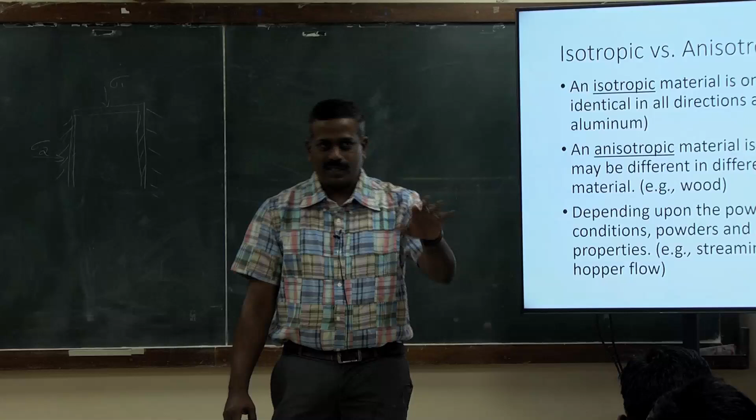Just for an example, you might know about different types of corn, right? You all know popcorn, yellow dent corn, high waxy corn, high amylose corn, etc., right? So their build of starch inside those corn, means maize, okay? You all know, right? So depending on this type of starch, their properties will also be different, right? Their mechanical properties - how the starch is intact inside the kernel will change almost all their mechanical behavior, okay?

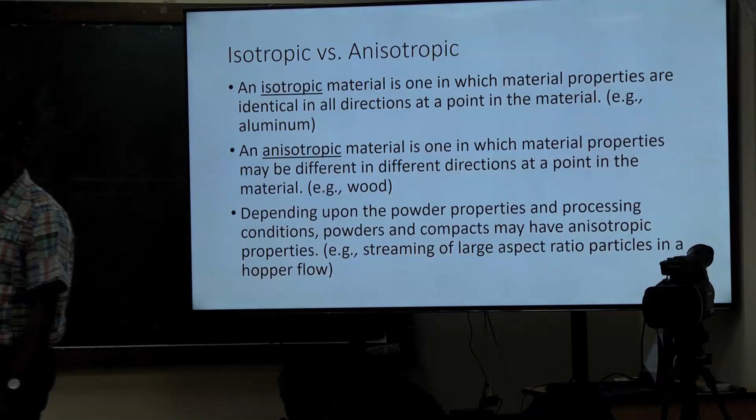Even optical properties, etc., okay? So again, for any powders or granular materials, the properties will change based on orientation, right? If you take a maize kernel, okay, so one side it will be germ, right? The other side it will be more starchy and protein component, right? So if you measure the properties on one side, it might be different than the other side, right?

So properties always differ, and again, other effects from shapes will also play a role. Composition, surface composition will also play a role when it comes to mechanical properties. But as said, the most basic stuff that we calculate is stress and strain, right?

Stress we calculate from force over area. Okay, there are two stresses, right? One is true stress and engineering stress, right? So true stress is divided by the current area.

That means when you are compressing or pulling - for example, you take a plastic sheet and pull, it slowly expands, right? But the cross-sectional area is also changing, right? It becomes thinner at the middle, right? So that's what we calculate in true stress. That means we account for the change in cross-sectional area.

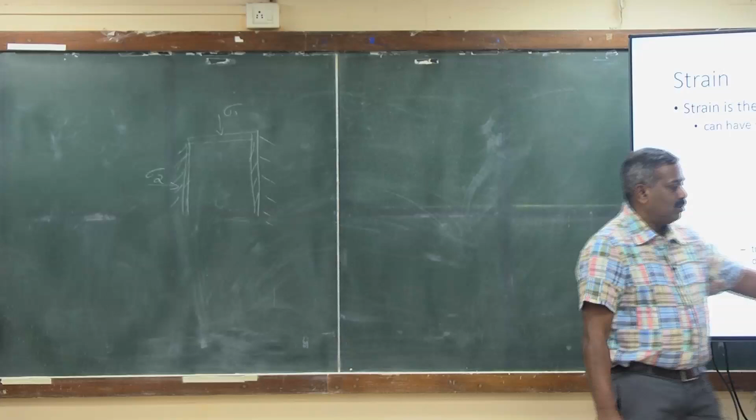But engineering stress is you take the original area that you are measuring, and that's it. You will not change the cross-sectional area for calculations, right? Same holds good for strain. Okay, so true strain again - change in deformation with the corresponding change in cross-sectional area.

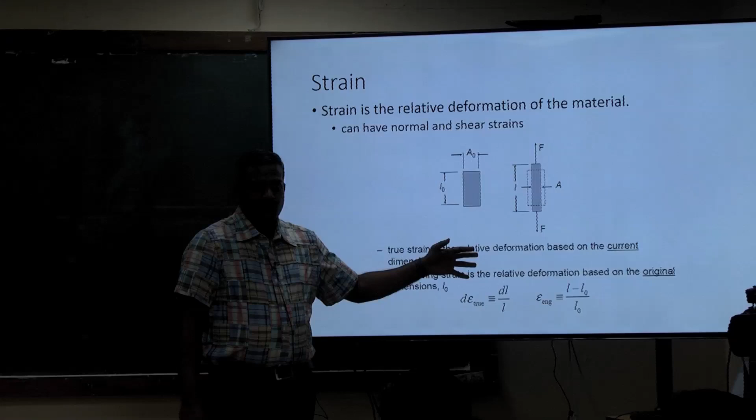But engineering strain is - we commonly don't take the change in cross-sectional area during the mechanical testing or mechanical process into those calculations. Okay, so calculating engineering stress and strain is easy, right? You know the cross-sectional area, you know the force, you do that, right? But for calculating true strain and true stress, it will be a little challenging. Okay, true strain, you can use some video recordings.

There are some LVDT - what's a linearly variable... dynamic testing instrument, that measures displacement. Yeah, that's very good. Yeah, displacement transducer, right? Yeah, LVDT - can use it to measure the change in cross-sectional area and get the true strain. Okay, so when you take a typical...

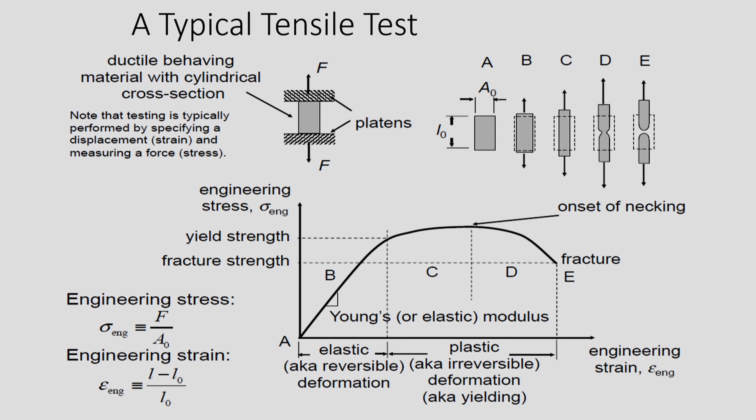Tensile test means you're pulling it. Okay, so what happens is - again, you can relate to pulling a plastic sheet, right? So what happens, it goes through elastic deformation, plastic deformation. At one point it breaks, right? So initially, at smaller loads, when you pull that plastic sheet, it also comes back to its original position, right? So that's the elastic deformation.

All the strength, whatever it lost during that pulling, will be regained by the material, right? But when you cross that yield point, okay, or yield strength, okay, there will be more change in cross-sectional area. That means there will be more change in the material behavior, where you will not regain it back. When you remove the stress, you will not regain back its original properties. Okay, that's the plastic deformation, right?

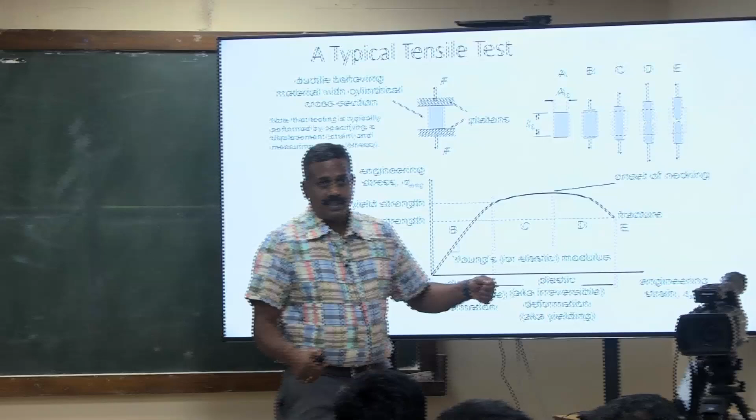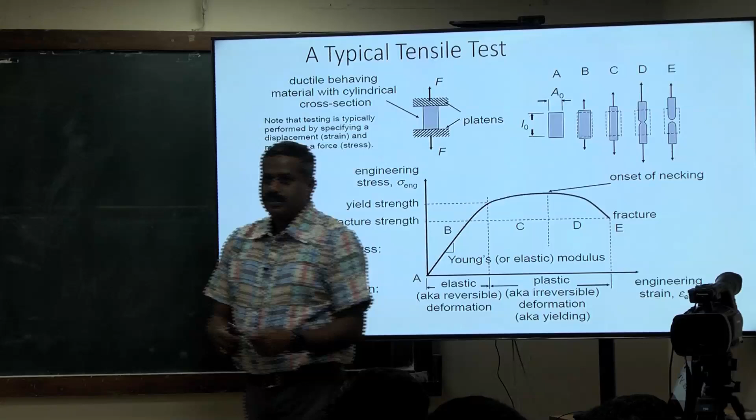Right, you all know about this—elastic deformation, plastic deformation, right? So when you keep on increasing the stress, you can imagine pulling a plastic sheet. At one point it forms a small neck, where it starts to break. So there will be an onset of necking, and then finally it gives up. You can easily relate, right? You would have noticed when you're tearing something or pulling something apart.

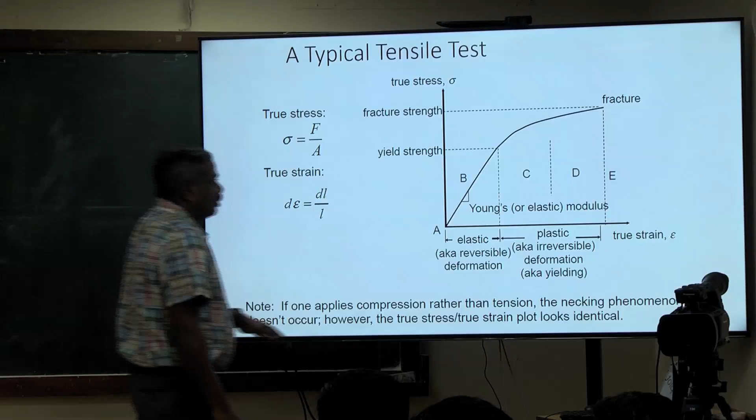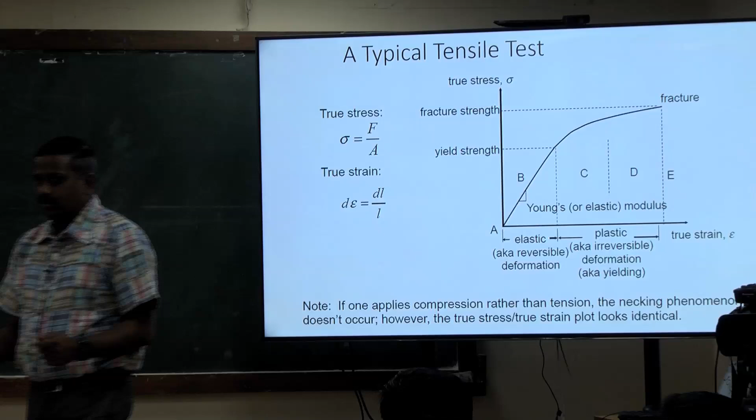This is a process we see when you are applying a tensile load, pulling it apart. But if you are applying a compression load, you might not see a necking phenomenon. So when you are compressing it instead of pulling it, it just breaks—it goes through plastic deformation, and finally it fractures. So those two different types of tests, compression and tensile testing, will be a little different.

But still it goes through some elastic deformation, plastic deformation, etc.

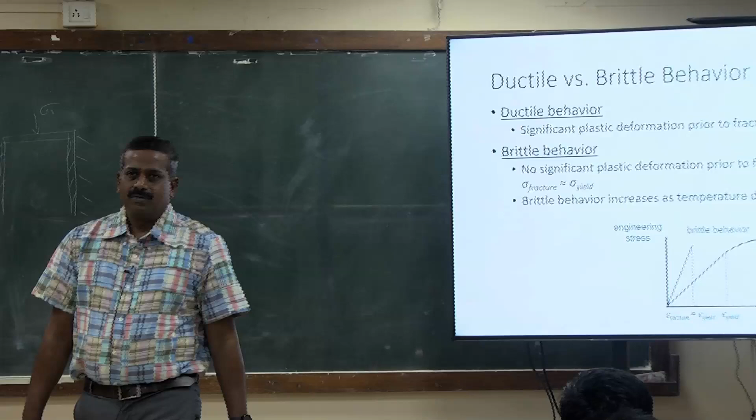So ductile behavior—again, there will be significant plastic deformation, comparing a plastic sheet. When you're applying some tensile load, it keeps on pulling until it breaks. But if it's brittle, what happens? It breaks suddenly, like comparing a plastic sheet to a piece of paper. When you pull a piece of paper, it suddenly breaks. That's brittle behavior—almost the fracture strength and the yield point will be almost the same. When you cross that elastic limit, it breaks.

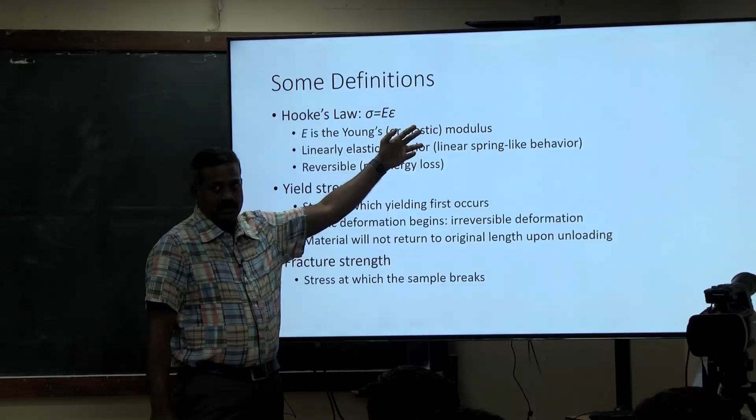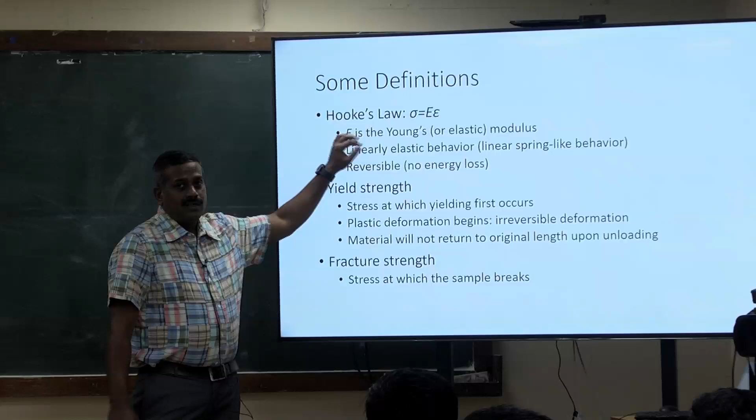And we can get this relationship from Hooke's law. Hooke's law, you all know about that—we use it for spring constants, getting those spring values. So stress is directly proportional to the strain, and the proportionality constant is the Young's modulus, or the elastic modulus value. Most commonly used for linearly elastic material. So if you have some odd relationship between stress and strain, you might not be able to use this Hooke's law. That's why it makes it very difficult to measure Young's modulus for biological materials—the relationship is not linear.

Again, yield strength—the stress at which it starts yielding, and there will be more plastic deformation, that's the yield strength. Fracture strength is the load at which it breaks.

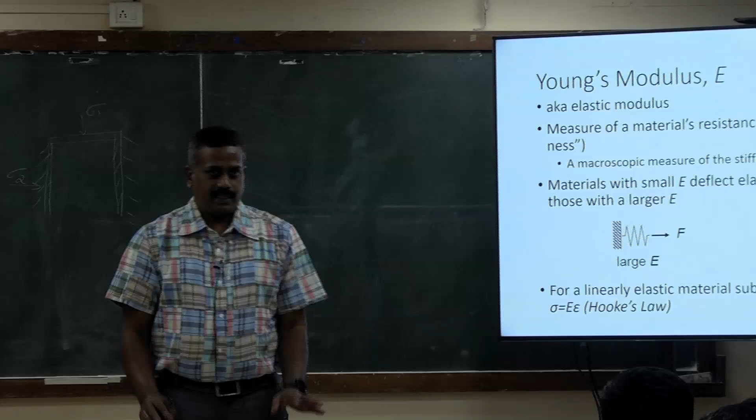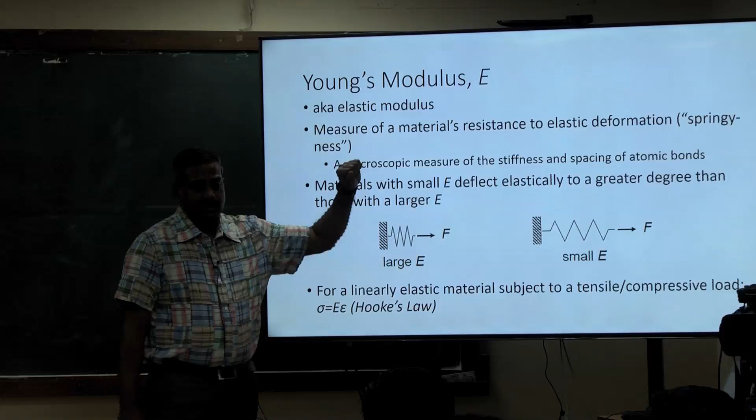So the first property, Young's modulus—we talked about it being a relationship between stress and strain, very commonly used to characterize the resistance to elastic deformation. We use the linear part of that stress-strain relationship—not the nonlinear part—just the linear part, to get the relation between stress and strain and obtain the Young's modulus value.

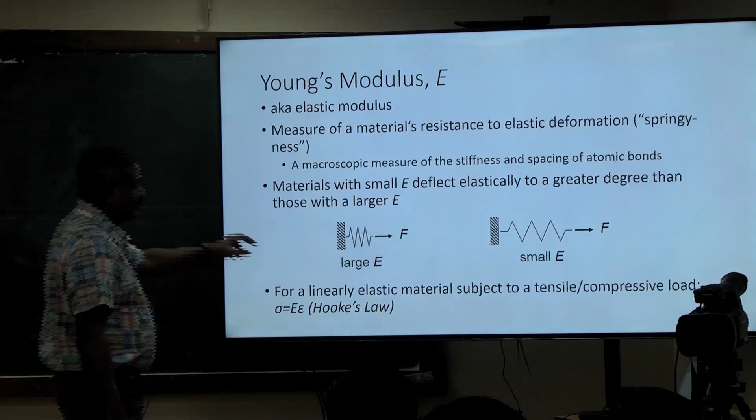And with a smaller E value, they deflect elastically to a greater degree. That means if it's a spring, the elastic modulus will be low, but if it's a hard material like compact or something, their elastic modulus will be high.

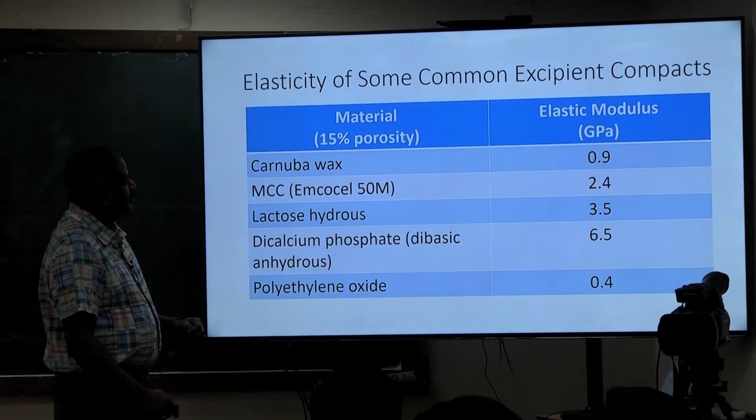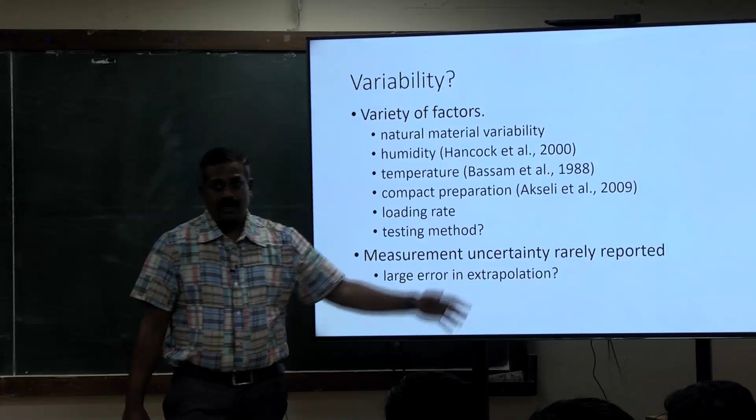Just quickly, as I said, if it's a lighter material, the elastic modulus is usually low, and the values apply mostly for pharmaceutical stuff. Elastic modulus is a material property, so the temperature, the humidity, and the conditions the samples are in will affect these elastic modulus values, including how we prepared the compact—like what strain rate we use to prepare a compact will also influence the elastic modulus. Loading rate, strain rate, testing method, etc.

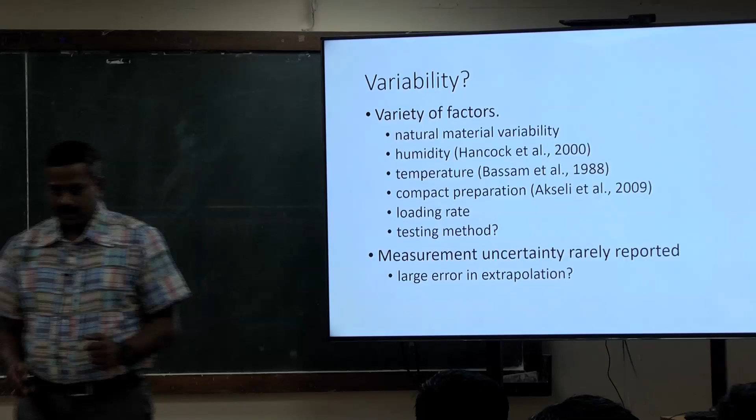But in general, you might remember the Spriggs equation that we talked about yesterday, which we used to get an extrapolated value. So one of the major challenges is extrapolation to zero porosity value—that gives large errors, so mathematically defining this is a little challenging.

Humidity also plays a larger role—I will not go into that theory. The presence of water loosens those stronger mechanical bonds between the particles within the compact or any material, and this affects the overall mechanical strength and influences the Young's modulus value.

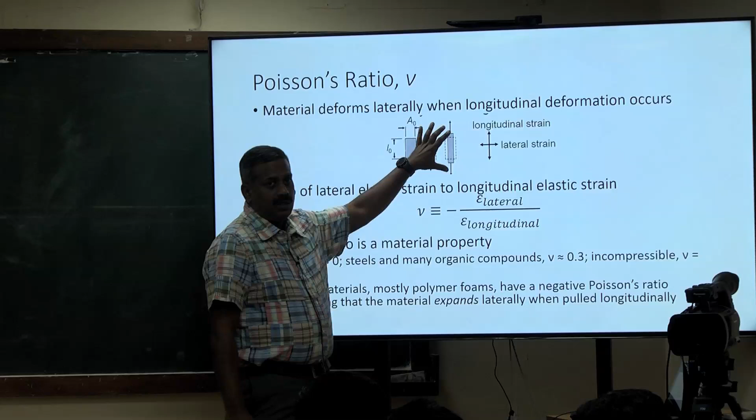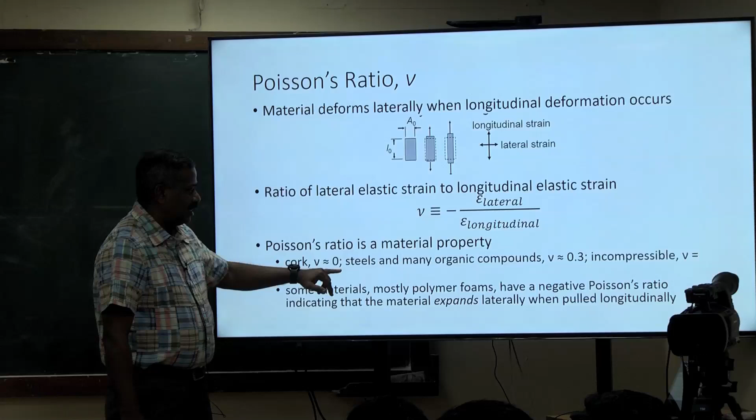Poisson's ratio is the relationship between lateral and longitudinal strain - how much material moves sideways relative to overall lengthwise movement. If you take that ratio, you get Poisson's ratio. Mostly incompressible material is 0.5, highly porous material like cork is usually 0. But for some materials like polymer foams, you might see a negative value, since when you pull them they expand laterally, giving a negative value, especially for foam materials.

Shear modulus is the ratio between shear stress and shear strain. It comes into play with flow of powders. You calculate shear stress, and you can calculate the shear strain - the strain needed to make the powder move or flow. You get those two properties and then get the shear modulus.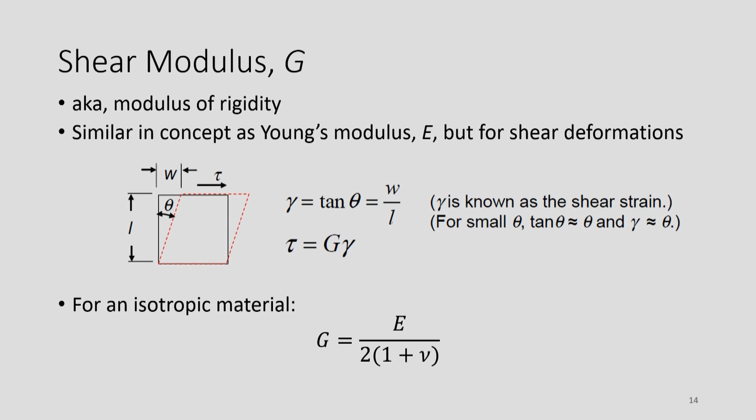There's a relationship that relates Poisson's ratio and elastic modulus to the shear modulus. I'm not going into the derivation, but these are simple formulas you can use to relate them - if you know two of these, you can find the other one. As the picture indicates, shear comes from one layer moving over the other layer.

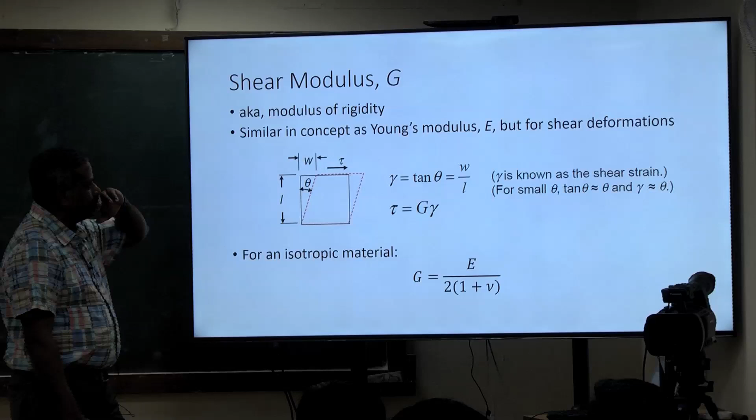Bulk modulus mainly applies when compressing materials - the change in pressure and the change in volume. When you compress a material uniformly from all 360 angles, it compresses in volume. That change in volume over applied pressure is the bulk modulus, and again it's in the negative direction. You might see negative values - for incompressible material it's usually high negative, for easily compressible material it's low negative values.

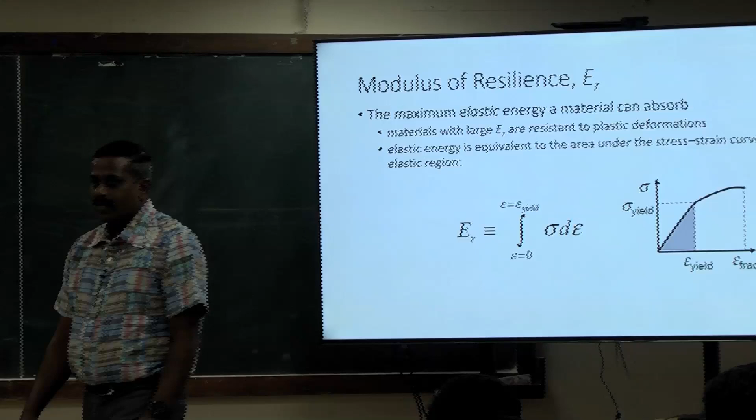Modulus of resilience is based on elastic energy. You take the area under the curve until it behaves as an elastic solid - that's the modulus of resilience. If you take the stress and strain at this point, that's the modulus of elasticity, but if you take the area, that's the modulus of resilience. That gives how much energy it loses and reabsorbs when applying stress and strain - the calculation of energy lost during this.

Toughness modulus is until breakage. You take the area under the stress-strain curve until it breaks, which gives the toughness of the material - how much energy it takes to break any material. This could apply both for compression and for tensile measurements.

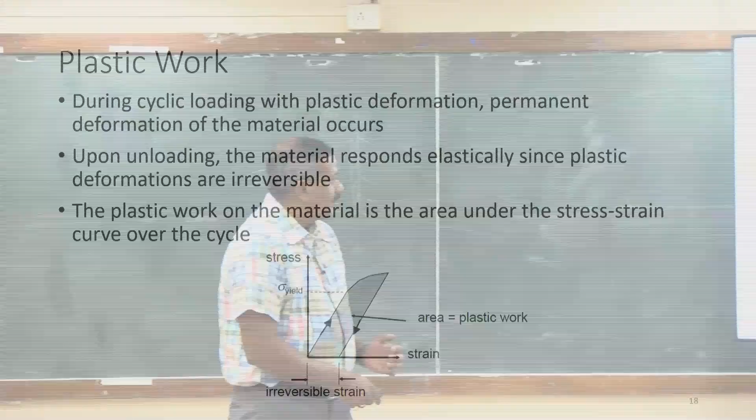Can you give some examples of these applications? We talked about examples before, and you all wanted more examples. So where do we apply this toughness modulus? Any examples that you can think of? Why do we have to characterize toughness modulus?

To determine up to what load it can be stable. So exactly, where do we see those applications? To differentiate between ductile and brittle - if the modulus of resilience and toughness are the same, we can say it is brittle, otherwise it's ductile. Sure, cracking some material.

Cracking - very commonly you can use this for milling purposes, that's a very common example. So how much energy it takes to mill or break into pieces, because when you exceed this toughness modulus, it definitely breaks. It's losing the same amount of energy that will be needed to break the material. So the same thing applies for modulus of resilience too - any examples of where we can apply modulus of resilience?

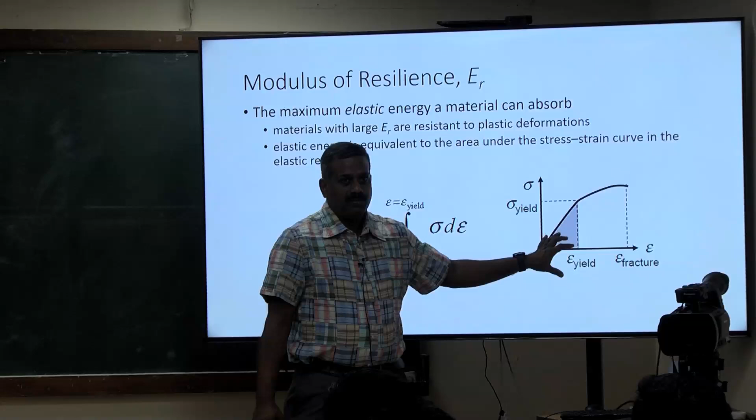You would notice this almost every day when you go shopping for fruits and vegetables - that's modulus of resilience.

In polybags, how long you can hold the bag before it breaks. Can you think of any example on fruits and vegetables? Like how we can keep the fruits and vegetables so that they will not get damaged. It can help with that.

So exactly for that, sometimes when you buy apples, you might see some brown spots. How does that brown spot occur? From damage, some impact damage, or some kind of abrasive damage.

But if the load applied on the fruit during handling is less than the modulus of resilience, then there will not be any brown spots. But if the load or energy applied on the surface of the fruit or vegetable exceeds that, then you will see brown spots. Based on the energy applied, the area will also increase.

I'm not giving applications or examples here, but you can relate these properties to almost everyday things that we do.

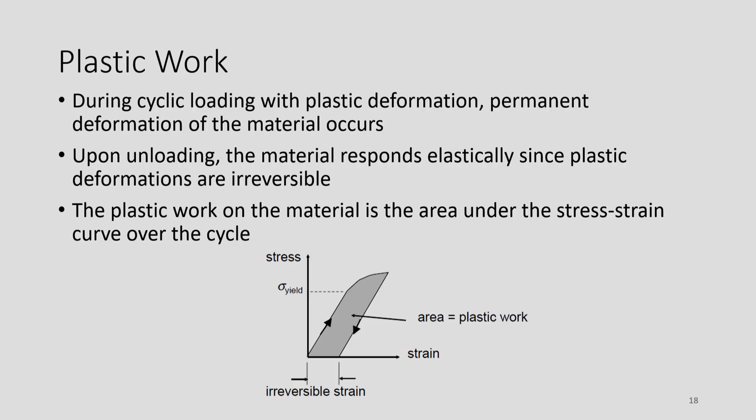Plastic work is mostly for cyclic compression. For example, I'm compressing this material like 100 times. When you keep compressing, once it exceeds the elastic limit, you lose some plasticity, you lose some energy. The difference between the loading and unloading curve, after it exceeds the elastic limit, is called the plastic work.

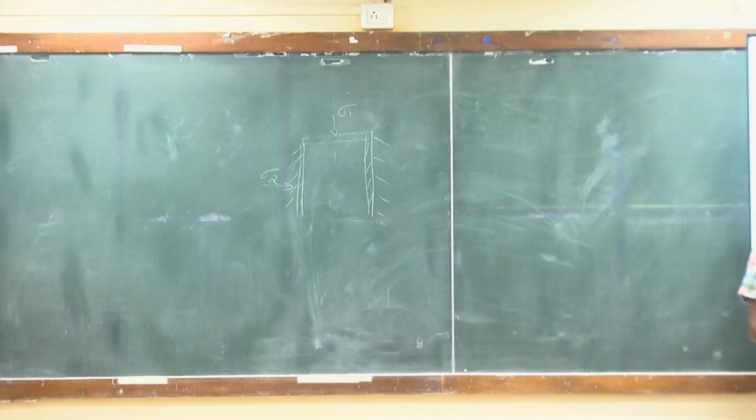So it's the amount of energy that the material loses between multiple cyclic compression or tensile loads. So what example can you think of where we apply this?

So hardness is the surface resistance to plastic deformation. We mostly use this when it comes to abrasive damage, like on the surface of fruits. If you wanted to avoid abrasive damage, the load should be lower than the hardness limit of the surface of the material. Increasing hardness implies higher resistance to permanent damage. You might know some stone fruits are very resistant to cut or abrasive damage.

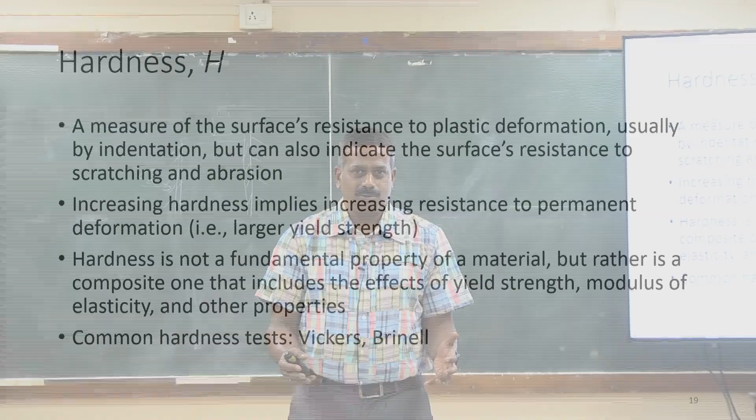But if the fruits are soft like grapes or apples, they easily damage. Again, very similar to the other properties, hardness is not an individual property, but depends on other values like Young's modulus, yield strength, composition, etc. that influence this hardness.

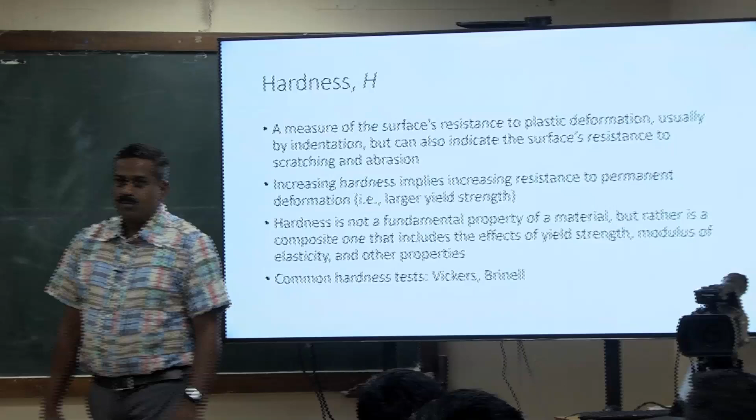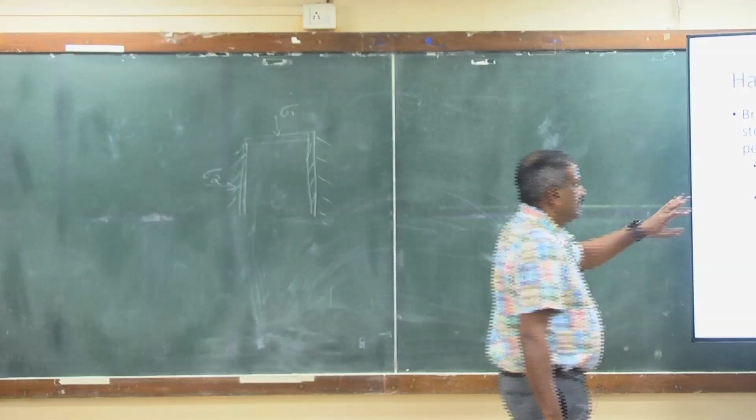Only a minor difference here: in the Brinell hardness measurement, they make a spherical indent on the surface of the compact, and then based on the measurement of that permanent deformation and the other force and dimensions, you calculate the hardness of the material. Simple formula, simple calculation.

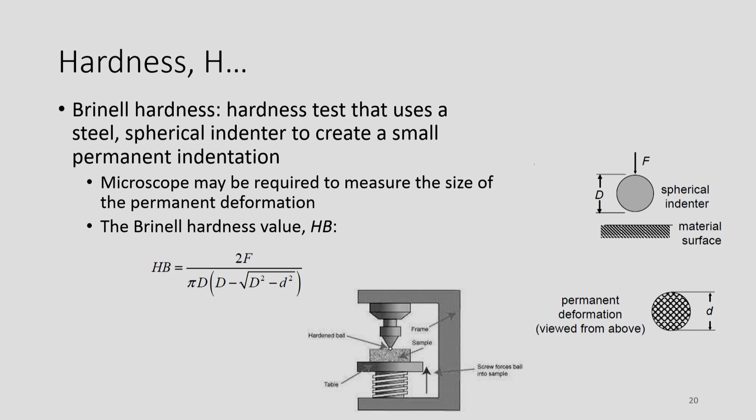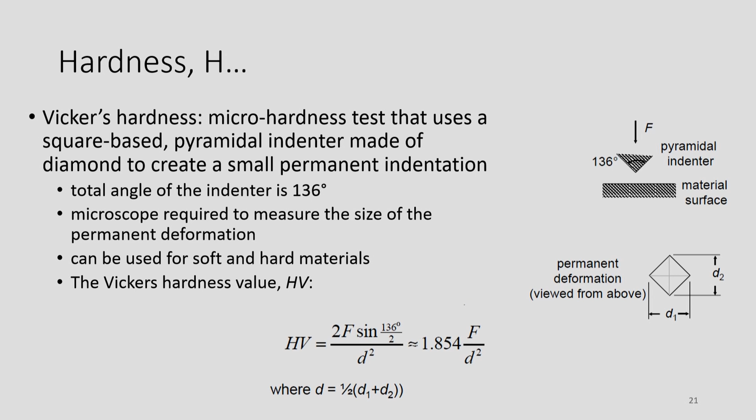The Vickers hardness is a little different, it makes a diamond shape indent. Their stress calculations are a little different for a round indent versus a diamond indent, so the values and calculations will be a little different in these two methods. But both are most commonly used for testing the hardness of compacts.

Fracture energy, again, will depend on the stress concentrations. If you have a corner or some cracks on the surface of the material, there will be higher stress concentration around those cracks and on the surface. So that will be the highest probability place where it starts breaking. That's what we characterize using fracture test.

Creep, again, is a progressive deformation. You apply some stress, keep the stress constant, and monitor the change in strain, how it's deforming. So that's called creep. Over a period of time, the strain might change. There will be primary, secondary, and tertiary creep. But if it exceeds that creep limit, there will be a fracture.

Or the material will show more plastic deformation. It's also highly temperature dependent, mostly for compacts and other manufactured materials. But it also depends on other parameters too, like thickness, composition, etc.

Can you give one application from fruits and vegetables where we apply creep to know their behavior? Think about applying the stress, keeping the stress constant, and worrying about the strain, the change in strain or the dimensions. Think of one application where it would be useful to know the creep behavior. Think about fruits and vegetables. One clue.

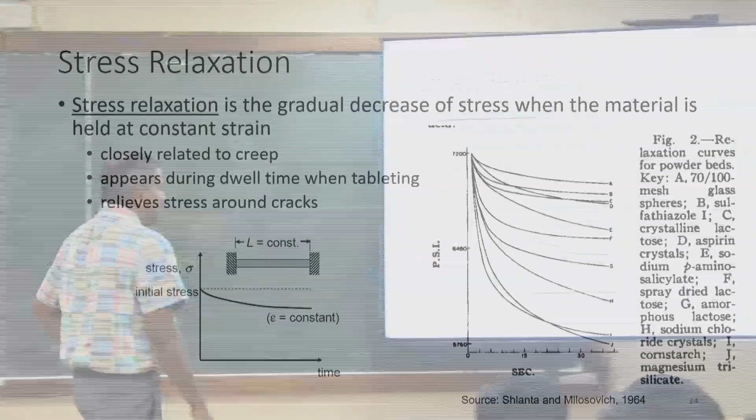A similar, almost opposite concept is stress relaxation. You compress a material and keep the strain constant, and measure how much it's losing in stress, how much it's adjusting itself to that condition. If it cannot adjust to that condition, then it will fail - there will be more plastic deformation. But if it can relax to its original position, then the material stays within its elastic limits. That's stress relaxation.

There are some examples here. It depends on the material properties - some relax immediately, some materials will take a lot of time to relax. For example, watermelon could relax immediately, but for apples and softer fruits, it might take time for them to relax. Again, all these properties come into play when you are handling materials.

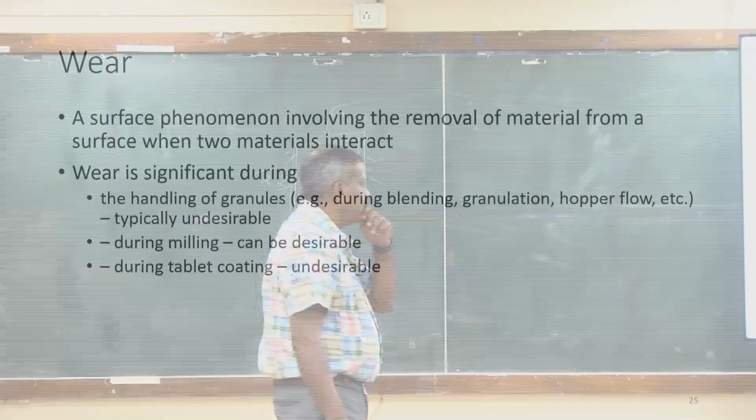So wear - we talked about wear and friction, right? When one material passes over another surface, one surface could lose some components due to wear. It's very significant during handling of materials. For milling, wear is desirable because you want to break particles into smaller pieces. But for handling and shipping, it's not desirable - you want the material to stay intact.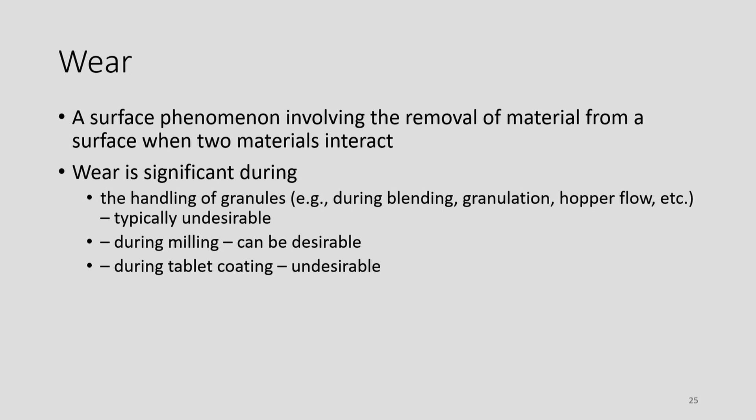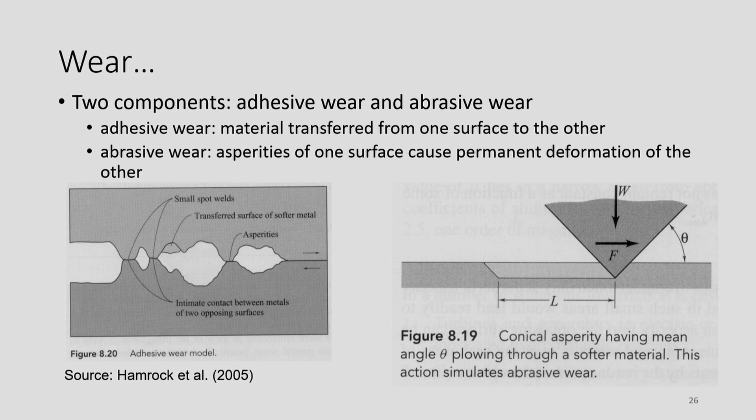It's very similar to what we talked about in friction. There will be multiple asperities in contact between the surfaces, and as one surface moves over the other, there will be stick-slip motion. For example, in these asperities, it sticks, and when moving, it slips - there is no contact between the materials at that point.

There are instruments that can calculate the wear. One is the tribometer - tribology testing is common to get the wear strength of materials. For compacts, a conical asperity tester is common, mainly used in the pharmaceutical industry.

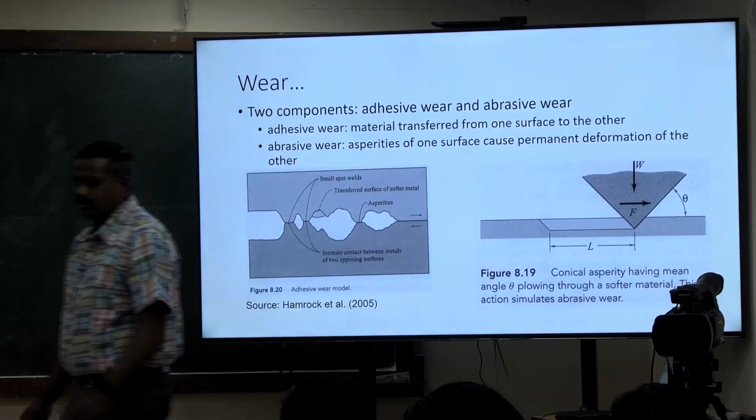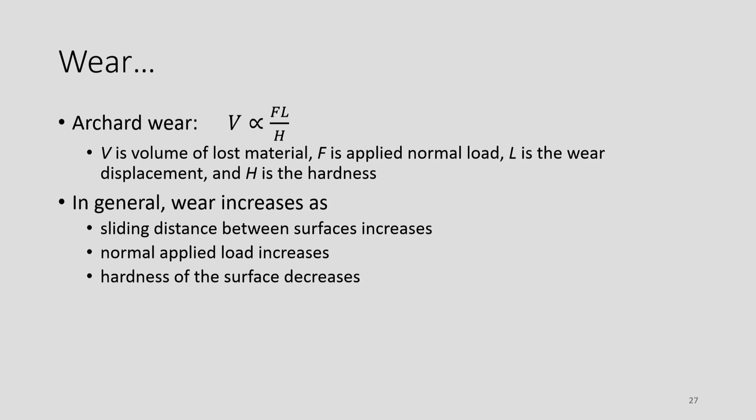But there are models. If you are using DEM modeling for breakage, etc., you will use some models to calculate wear. One common model is the Archard model. Based on the force you apply, you can calculate the volume of material lost from the surface. It's an easy calculation.

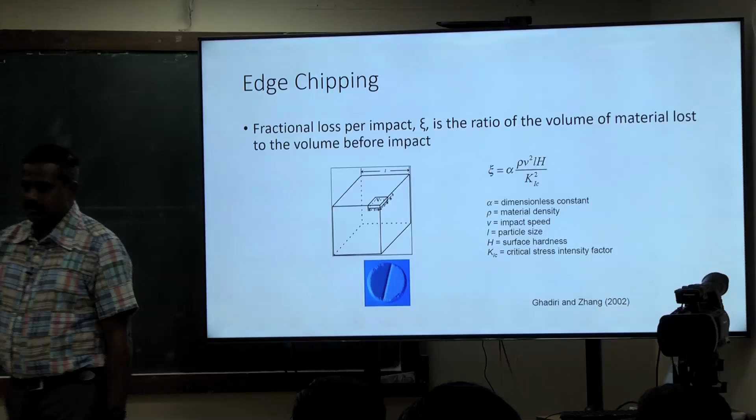Edge chipping is very common in pharma. Sometimes when you open tablets, you might see some edges are not uniform - that's edge chipping, losing material from the surface. It's a big problem in the pharmaceutical industry, and if you're going to compact powders in the future, this will be a problem too. Do you know why edge chipping occurs? Due to non-uniform stress on the edges, there will be higher stress. Also, if you do not lubricate well during the compaction process, you lose materials.

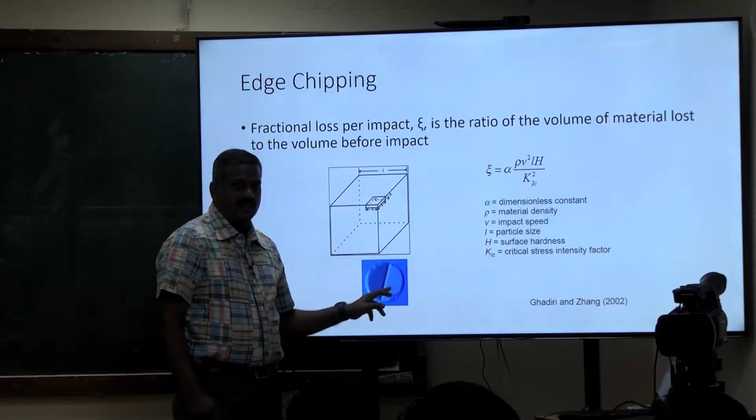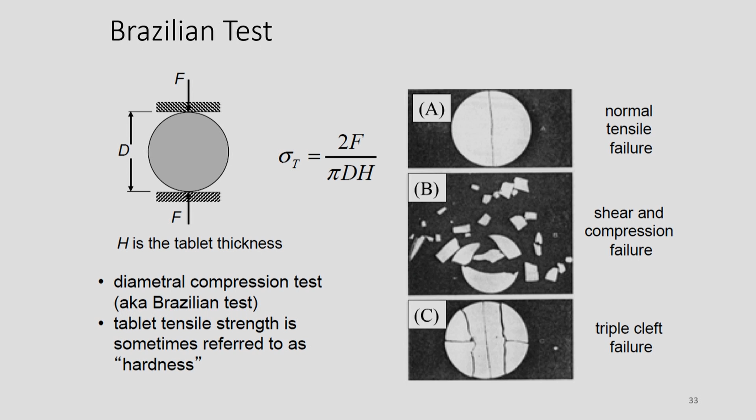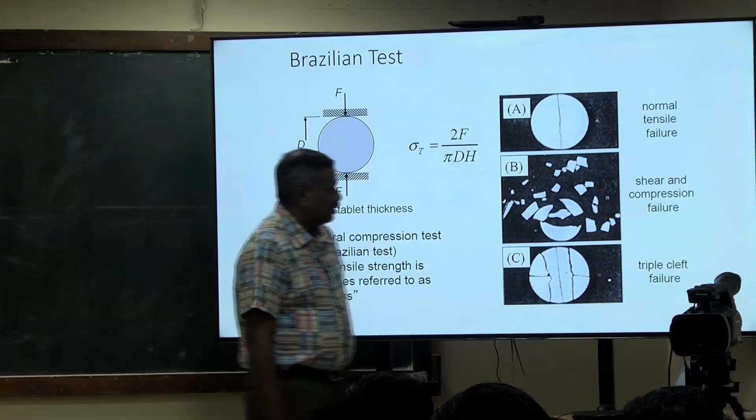So, tensile testing. We assume that the forces acting on all sides are equal, so you compress the material. The test is called tensile testing, and tensile means pulling, but how are we applying force? We're applying compression. So we assume that the forces in both directions, compression and tensile, are equal. It doesn't happen all the time, but it's a major assumption we make so it's easier to measure the tensile strength of compacts.

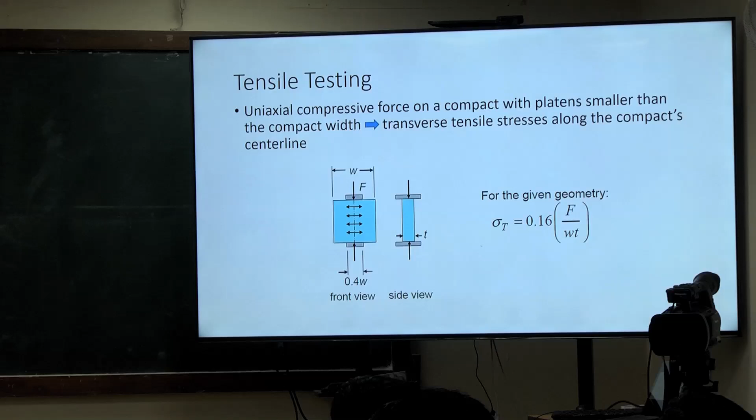For sheets, plastic sheets, paper, simple materials, you can just pull them and measure the tensile strength. But for compacts, hard materials, you cannot pull them, so it's very difficult to measure tensile strength directly. So they developed these methods where, using compression, you measure the tensile forces.

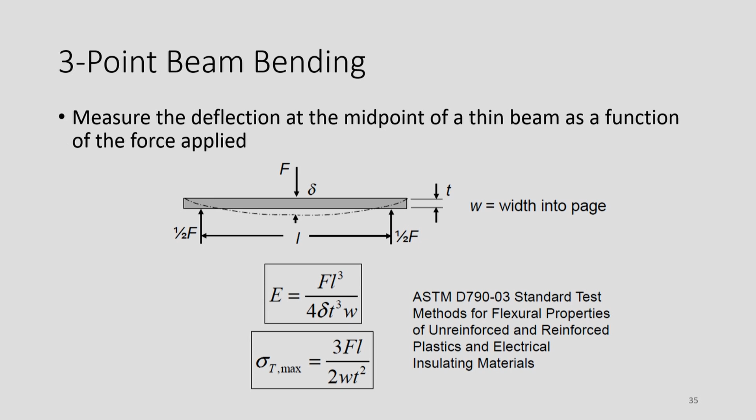Same application for testing tensile forces using 3-point bending. I'm not sure if any of you have used 3-point bending. You keep the compact or material on a surface, with 2 points where it's held on top of those 2 contacts. These are the contacts where the compact or material is kept, and then you apply force at the center between those 2 holding rods.

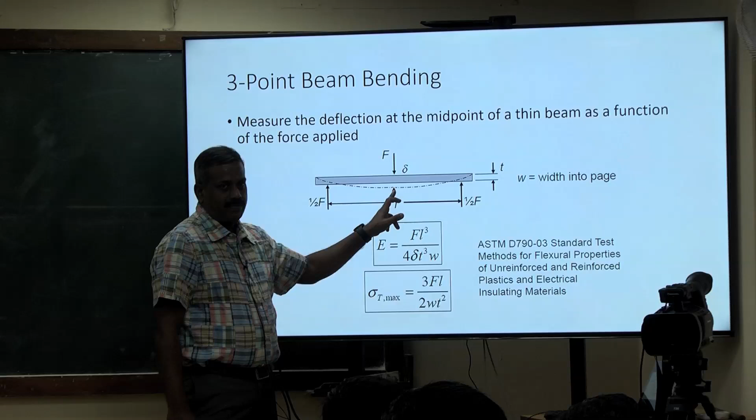You apply force, and you assume that the compression force applied on the top is equal to the tensile force occurring on the bottom. Because the force here is compression, but here it's tensile - it's extending, it's a tensile force. So we assume that the compression force applying on top is equal to the tensile force occurring at the bottom, and using that assumption, we calculate the tensile behavior of the material.

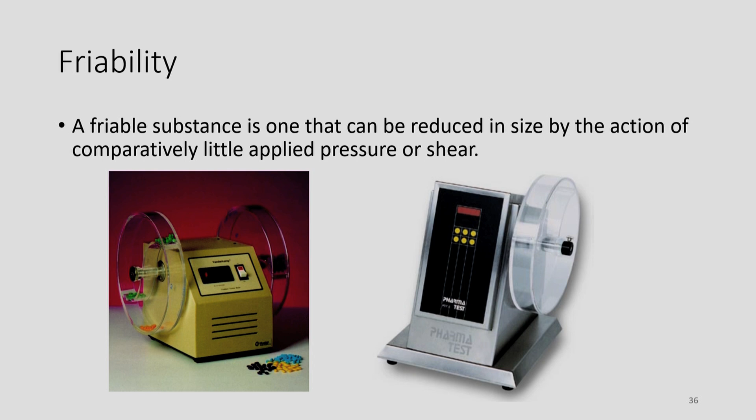Friability, if you're working on compacts, is common. You put some compacts into a friability tester and rotate it for some time. This is very common for compacts and also granules, like fertilizer granules or any type of granules - you can see how much material is lost during handling and shipping. You rotate for some amount of time, and from the amount of sample lost during that rotation, you calculate the friability.

We have some time for questions, not only on this topic. Sir, could you explain to me about the real modeling? What is it?